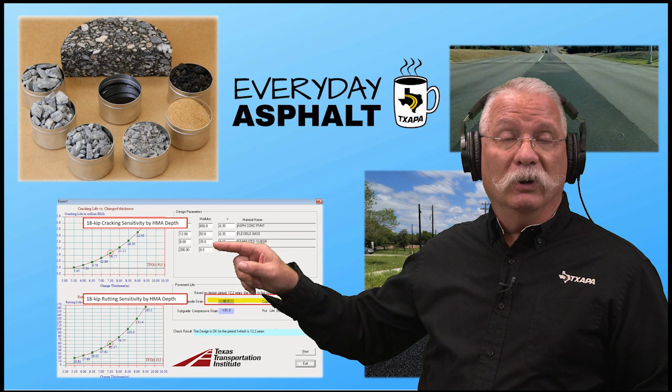This program goes a little bit deeper into the areas of materials, design, construction, and maintenance. It's really important that we understand the interrelationship between all these programs. So we're taking our engineering class, which is available online, and taking these programs, which meet every third Thursday of the month at 3 o'clock, and going a little bit deeper. Today we're going to go a little bit deeper on pavement design.

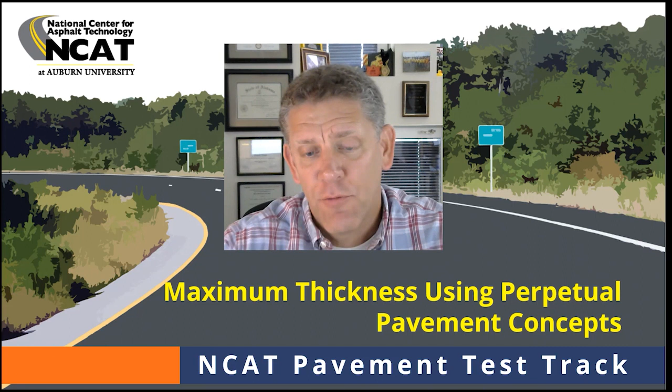Before I start talking about perpetual pavements, I want to provide an overview of where we've been and where we're going in terms of structural pavement design for flexible pavements. Before the 1950s, it was really experience-based - you had local engineers, usually geotechnical engineers, who knew their materials, the traffic and the soils, and they were able to come up with pavement thicknesses pretty reliably under relatively low traffic demands. However, as we advanced into the 1960s, we had the rise of the interstate system and much more freight being carried over our highways, and there was a need for a more robust design system. This led to the development of empirical pavement design methods in the 1960s.

Jump forward into the 1980s, and there was a realization among pavement engineers that we needed an even more robust and more adaptable design system. This is where the first mechanistic-empirical methods were proposed. The problem we had in the 1980s is that we had the ideas, but not the computational power.

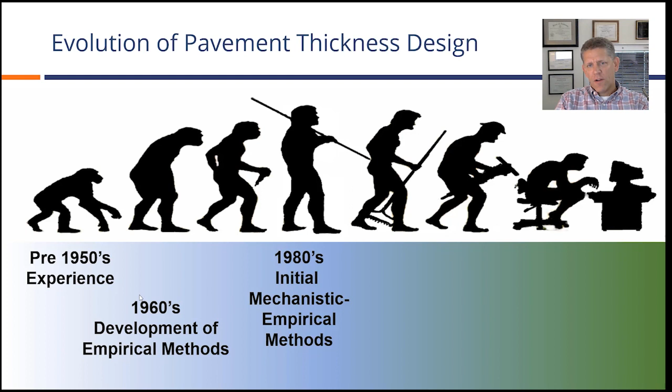It required supercomputers to do the computations needed for this type of design, this mechanistic-empirical pavement design. So it really had to be put on the back burner until we got into the 1990s when computing power caught up with it. Then we had NCHRP 1-37A, a big national project whose main objective was to develop the next generation of pavement thickness design for AASHTO, at that time called the AASHTO 2002 Design Guide.

It's now called the MEPDG, or Mechanistic-Empirical Pavement Design Guide, and it really ushered in the era of ME design. Many states are currently grappling with how best to implement ME design, and that's really where we are now in the 2000s: implementing ME methods. Most state DOTs have either implemented or are doing studies to help them implement ME design.

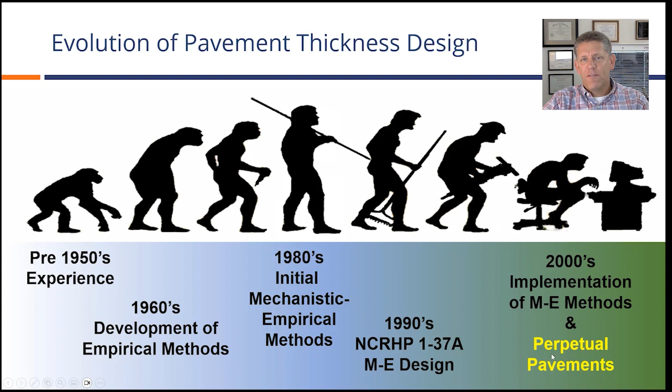As a subset of ME design, we now have perpetual pavements, and that's really the focus of what we'll be looking at. Where we are today, across the U.S., is that we have a variety of empirical or mechanistic-empirical approaches in use. The goal of any design system is to optimize the thickness for the prevailing conditions: the traffic, the environment, the materials you have at hand.

Calibration of those design systems is really critical. You might have heard about calibrating mechanistic-empirical design, or calibration studies, and all of that is geared around making sure that your design system accurately predicts the performance of the pavement so that you can come up with optimized pavement cross sections.

Most of these design systems, many or most of them, do not check at the end for maximum pavement thickness. It's really up to the engineer. Maybe there's a policy decision that has been made somewhere, written down somewhere, but most of them do not have built into the system a check for maximum pavement thickness.

So if you're running the old AASHTO 93 or running a mechanistic-empirical approach, as you continue to add traffic or have higher and higher traffic levels in that design, it'll recommend or require greater and greater pavement thicknesses, and that can quickly lead you into a situation where you have overly thick asphalt pavements.

What's shown in the picture here on the right is a core that we cut out. We had an experimental program going on in partnership a number of years ago with a provincial government in China. They have extremely heavy trucks, and we developed a perpetual pavement experiment, helping them develop and deploy an experiment there. This is one of the 5 sections we built, with a core cut from it.

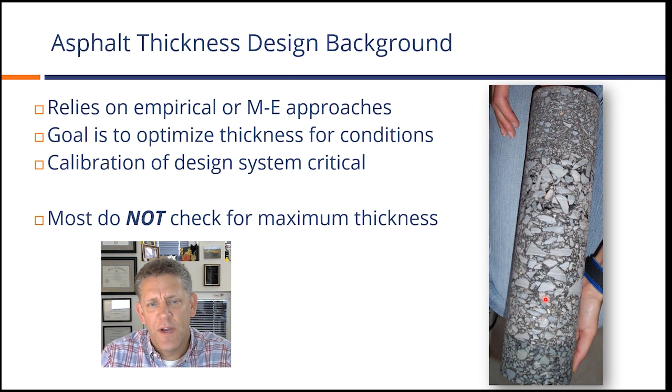To demonstrate this idea that more traffic means more pavement thickness, let's look at a simple example from the AASHTO 93 design guide. What I've got in this plot is AC thickness on the vertical scale, the required pavement thickness, versus the traffic level characterized by millions of ESALs.

Keeping all else constant, you can see that in this design framework, which many states use, as we continue to increase traffic, we have a continued increase in pavement thickness, and there really is no upper limit to it. The rate of change may decrease, it may start to level out, but it just continues on.

In some urban high traffic environments, we can quickly get to traffic levels on this order of magnitude: 50 million ESAL, 100 million ESAL, 200 million ESAL. The sad truth of it is there's no natural upper bound to this according to AASHTO 93, other than what engineering judgment or policy decisions may be made within a local agency.

So the idea with perpetual pavement concepts is that somewhere along this curve there ought to be a maximum pavement thickness. We need to know where it is, so that once we get to or above that point, we don't need to continue adding thickness to the design. We need to be paving further rather than deeper to make the best use of our resources.

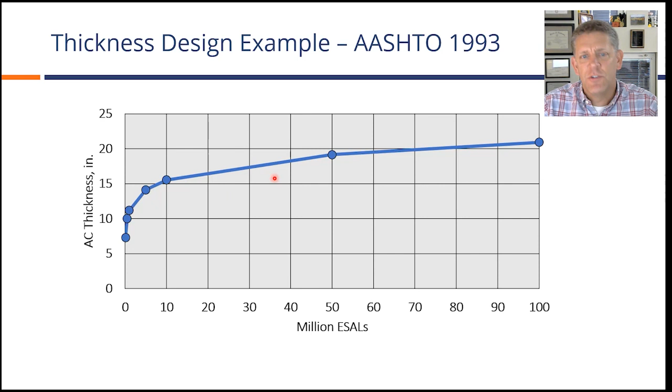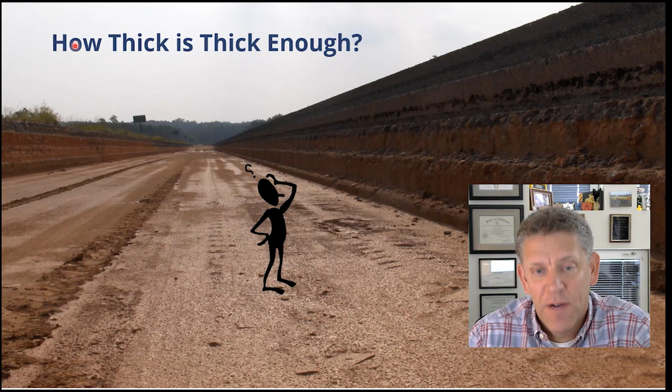Remember that a perpetual pavement is one that does not have deep structural distresses, meaning bottom-up cracking that initiates and propagates to the surface of the asphalt, and we don't have deep structural rutting. So it all begins by focusing our attention on a strong pavement foundation that considers drainage. On top of that, we have these various materials, and we're selecting high-quality rut-resistant materials in the middle and upper layers to combat rutting of the AC mixture.

And then down towards the bottom of the pavement, we need to think about the fatigue resistance, the cracking resistance of that material, because if we do a good job of that, and build it just thick enough, we're not going to have enough tension occurring at the bottom of the asphalt to initiate and propagate a crack to the surface of the pavement.

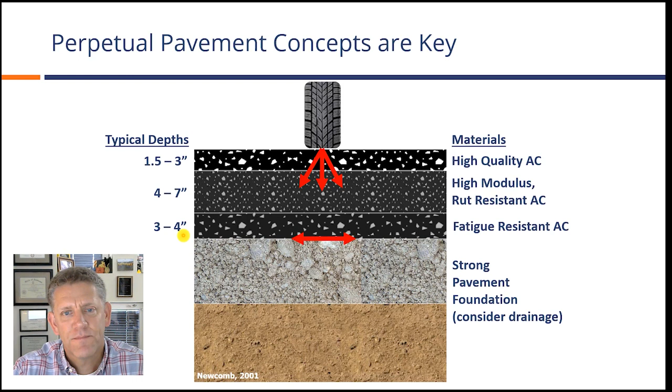You'll see in my following slides and some information that I'll be presenting in just a minute that what we see in the real world is exactly this. We're not looking at 20-inch pavements to achieve perpetual. We're looking at something in that about 8 to 14-inch range to get us there in terms of a maximum pavement thickness.

So how do we come up with a specific set of thicknesses for the design conditions on a case-by-case basis? That's best handled through mechanistic-empirical pavement design. Perpetual pavements is a subset of that. So let's start with ME design, and then we'll do ME perpetual design.

So ME design begins by coming up with a set of pavement thicknesses. We have to guess at what those ought to be, and also characterize the material properties alongside that, say the layer moduli of each pavement layer within the pavement system. We then simulate a loading event on the pavement surface and use a mechanistic model.

So this is the M part of ME design. We use a mechanistic model to calculate a critical pavement response. And then we have an empirical relationship that links the mechanistic response to an empirical prediction of performance. So we know we have a certain amount of strain happening in the pavement under this set of conditions, and then the prediction is made empirically about how much cracking we're going to see.

And we can do that for bottom-up cracking. We can also do that by looking deeper in the structure at the pavement responses there and make a prediction about how much rutting we might see. So that's the two parts: the mechanistic is all the layer property, material property, load event, and so on to get us to a prediction of how much stress or strain we see. And then the empirical part is that empirical link to take that stress or strain and then predict performance from it.

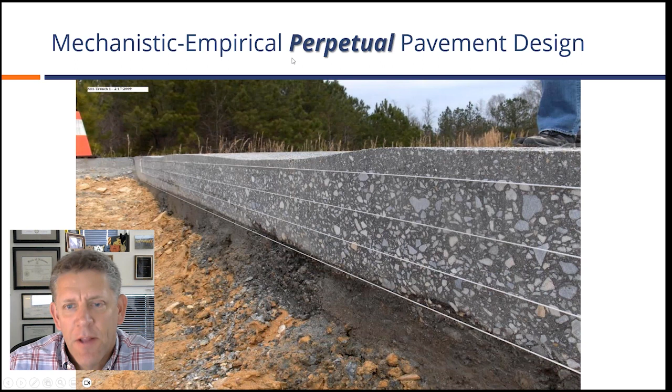Perpetual design has many of the same elements. We still characterize the layer thicknesses and the layer properties. We look at load events, very specific load events in terms of load magnitude. We calculate pavement responses, but now instead of making an empirical prediction of performance, we're trying to limit how much strain we see to some critical level.

We call it the threshold strain or the endurance limit. And if we keep the strain level that we see in the pavement below the endurance limit, there will never be enough, say, tension at the bottom of the asphalt to initiate or propagate a crack to the surface. That's where we want to be in terms of perpetual design.

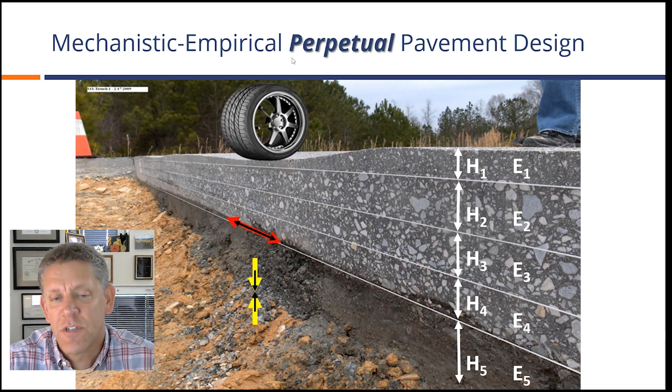And likewise, we can think about deeper in the structure and limiting to some endurance limit, limiting how much strain we see there so we do not see those types of distresses at the top of the pavement. So characterizing that endurance limit is very important in perpetual design.

So given the importance of the endurance limit, you may be wondering, well, how do you measure it? Where does it come from? One of the ways we can come up with an endurance limit is to measure it in the laboratory. We can take an asphalt concrete beam like this and stick it in a bending beam apparatus like that, subject it to repeated flexure, generating tension at the bottom.

We do that at a certain strain level and repeat it over and over, counting up the number of cycles until the beam fails. We normally do that over a range of strain levels. At higher levels, more bending, we generate relatively few cycles to failure, then we drop the strain level a little and get more cycles. We do that a number of times and eventually see a trend emerge where we can link the strain to the number of cycles to failure. This is what I talked about earlier as the empirical part of ME design: a link between a mechanistic response like tensile strain and an empirical performance prediction like the number of cycles until it fails.

This type of testing has been done since the 1960s. There are lots of studies done over the years, and they mostly have in common that you test over a range of strain levels, fit a curve to that data set, and extrapolate it down and up. But what that ignores is the fact that most materials, asphalt concrete included, have an endurance limit—a strain level below which you will not induce damage. If you run this test at a low enough strain level, you find it doesn't continue down.

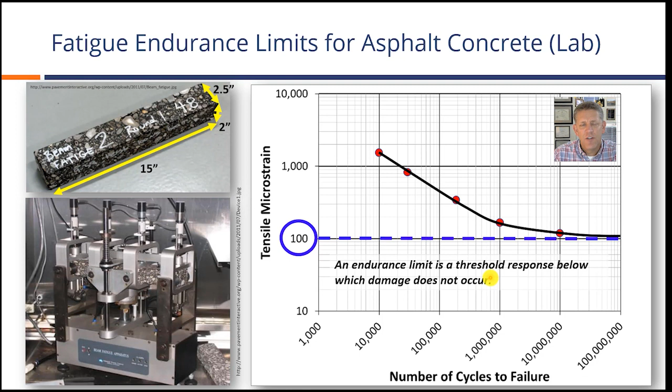So that's how we come up with it in a laboratory. That type of testing is done at a particular temperature and a particular frequency. Though it's meant to replicate field conditions, it doesn't really replicate real world conditions. In the real world, the pavement is experiencing a wide range of loadings, a wide range of environmental conditions, and it's perhaps aging over time. So rather than just having a single strain level, it may experience a whole range of strain levels.

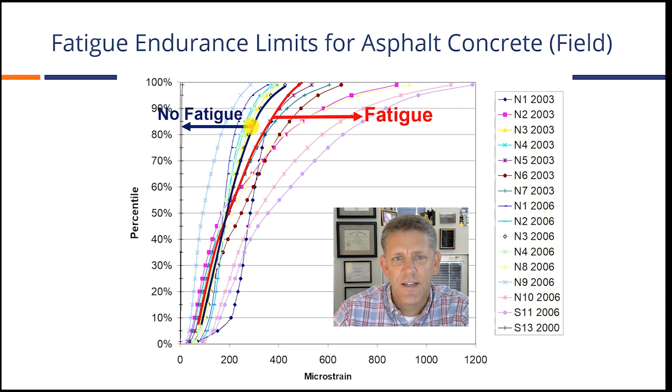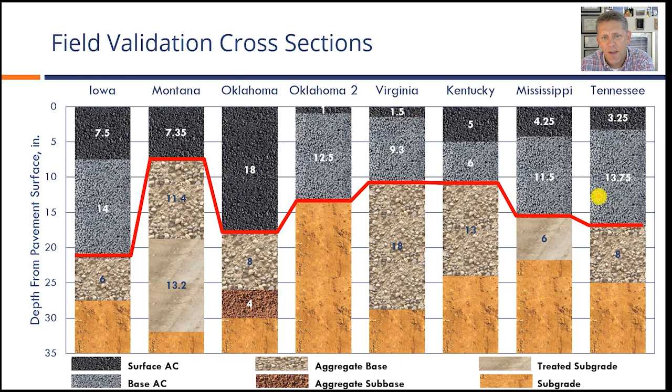So yes, we were able to validate that. You can look at, just like the other sections from the test track, some are less conservative, like Montana being the thinnest of the sections there. That came closest, but didn't cross it. If we look at the thickest section, Iowa, that was the 21.5-inch section. You might guess that would probably be pretty conservative, and compared to the criteria, it definitely was.

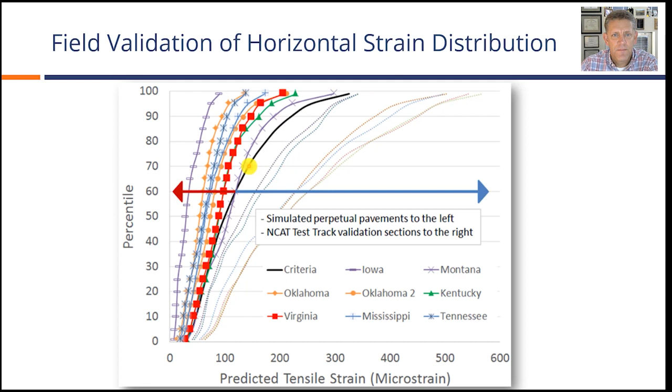And then we had everything in between. Again, these were all pre-existing old pavement sections that met perpetual pavement criteria in terms of performance, and every one of them passed that. So that gives us a lot of confidence that we can use a curve like this moving forward to design and analyze perpetual pavements and come up with maximum pavement thicknesses. So that validates the criteria for fatigue cracking.

What about rutting? If you read the literature and look at research done in this area, most people, or there seems to be some agreement, that we need to look at 200 microstrain vertical compression down inside of the subgrade and control that on average, so at the 50th percentile, for example.

So we took those same test sections that I was just talking about, simulated them, and what we found was that every one of them, the one that came closest was in Kentucky here, every one of them was below the 200 microstrain criteria. And so we felt like that was a good validation, and using that, it seems to give us some pretty reasonable cross sections as well.

And so we have both for bottom-up fatigue and deep structural rutting now criteria that were developed at the test track and then proven by looking at real-world perpetual pavement cross-sections.

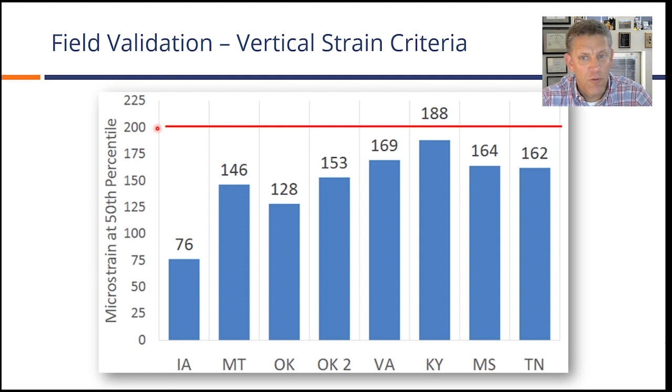The concepts that I've just been describing are embedded within a few different design tools that are freely available. You can find these online.

They were developed for the industry, and they utilize concepts like strain distributions to generate pavement thickness. You can use them to come up with maximum pavement thickness, so it's another tool in your toolkit. If you're doing design with an officially approved system like AASHTO 93, AASHTOWare Pavement ME, TxME, or some other program, you can use these tools as another way to look at the pavement cross-section and see what it's telling you in terms of thickness.

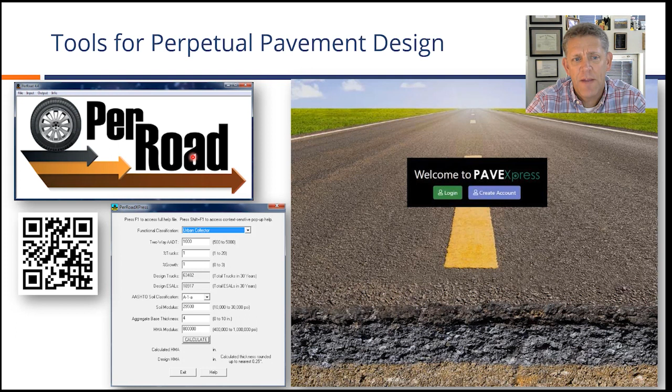Once we had the concepts worked out and the software developed to run what-if scenarios, we did a study led by one of our NCAT research professors, Dr. Nam Tran. We looked at a variety of support conditions, from relatively soft to relatively stiff foundations, and varied the base stiffness of the aggregate base similarly. We also looked at a few different climate zones, from cold to desert to more moderate, like here in Alabama, and tried different base thicknesses.

If you remember that first graphic from Dave Newcomb, he had it around 8.5 to 14 inches for a typical cross-section. Here we have a slightly wider range, 8 to 15.5, but we're definitely still in that same order of magnitude. We're not talking about 20-inch pavement sections, nor 3- or 4-inch sections — we're in that range of about 8 to 15.5 inches in this case.

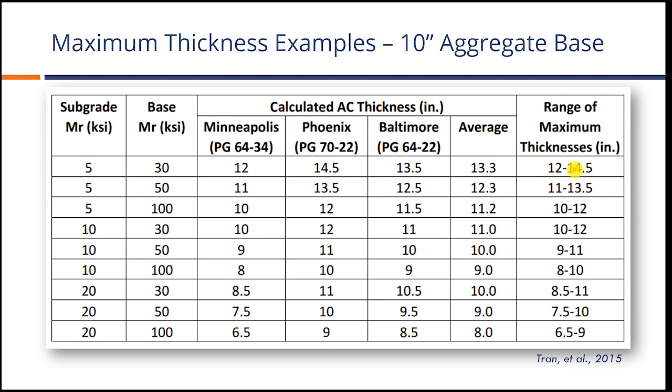From an implementation standpoint, tables like this are really useful because you don't have to go through all the software. You can look at your climate type and soil type, and if you're getting something north of 14 or 15 inches based on this table, you're probably designing it too thick and should investigate further.

They look at the hottest month and heaviest design load, using an axle load of 20,000 pounds, with July as the hottest month, plus some other assumptions and a pretty conservative strain level. They've gone through and done the computations, and the further north you are, the relatively thinner the maximum thickness; as you move further south, it gets thicker, accounting for climate changes across the state.

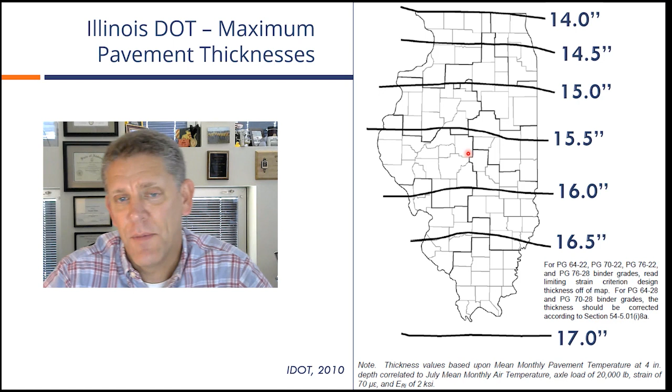In terms of implementation, they have a really simple, straightforward way of doing this. If your project is in the middle of the state and you're coming up with 17 inches, you're probably too thick and need to adjust down. They've used this for a long time and have a lot of confidence in it. So whether you're using a PerRoad approach with strain distributions or something like the Illinois approach, the application is essentially the same.

This is just a particular example, so don't read too much into that. At about 12.5 inches is what this maximum thickness is. But you can imagine that in a hybrid approach, we do a conventional design, but only up until we hit that maximum thickness, and then the maximum thickness takes over. And again, that might shift up or down depending on the prevailing conditions where they cross. But in this example, they crossed at about 12.5 inches.

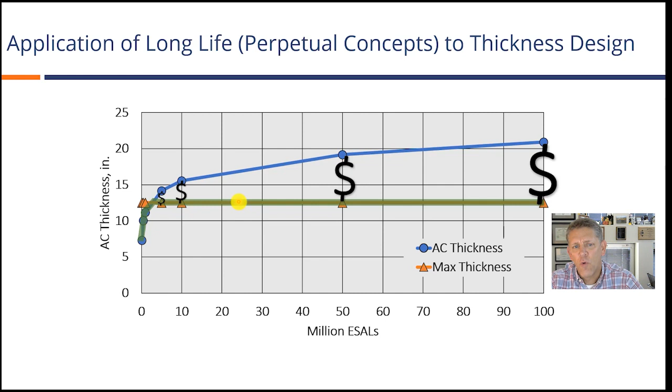And as we go further to the right here, we have greater and greater savings in terms of material, construction, and overall costs and so on. So this is a key concept with perpetual pavements: we can use it in a hybrid approach to just make sure that we're not over-designing and overbuilding our pavement infrastructure.

So to wrap up, I just want to close by saying that most modern pavement thickness design systems aren't checking for maximum pavement thickness. You may have a strong suspicion that it's over-designed and going to perhaps be overbuilt, but most of the systems, unless you have some policy document or something like that, don't automatically check for that maximum thickness. The perpetual pavement concepts that I have presented here today are proven. We have lots of perpetual pavement award winners from around the country.

These things exist. There's lots of data about them, and using that data is where these concepts come from. And we can use those concepts to generate a maximum pavement thickness over a wide range of conditions. It doesn't matter where you are, there's a system that you can follow to arrive at a maximum pavement thickness. If you use perpetual pavement in conjunction with conventional design, that can help you achieve more efficient pavement sections and keep you away from getting these overly thick pavement cross sections.

And finally, and I believe strongly in this, designer-friendly deployment is important. Having to run really complicated design simulations can be an impediment to implementing this type of thing. Having tables like I showed, or having a simple contour map that shows what the maximum pavement thickness is in your area, I think is a really effective way to go about implementing these types of ideas.

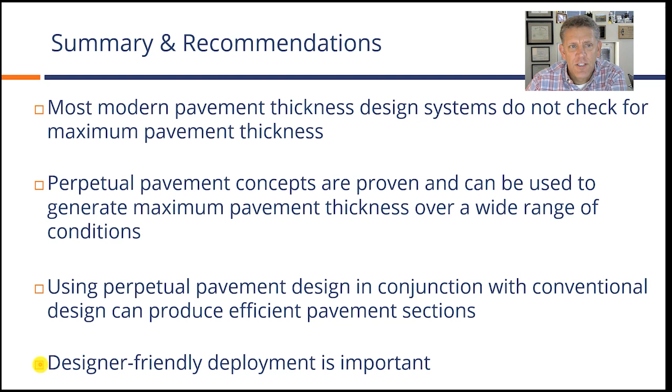And so with that, I'll just show you a couple of references. If you're interested, you can find these online very easily. If you go to our NCAT website, ncat.us, you can find some of our reports, and this one in particular that talks about these maximum thickness ideas.

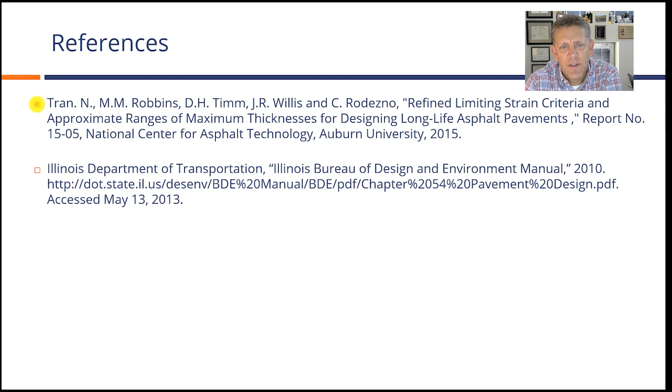Thank you. All right, we are back with David Timm. A great presentation, David, a lot of great stuff in there. I had a couple questions, if you don't mind.

You know, one of the things that's really interesting about that is, we think about the traditional load repetitions and that kind of stuff, and eventually stuff's going to fail, right? And I think that's the thing we learned about perpetual pavements today, is that if you don't overstrain that stuff, it's not going to fail. So we really can build these pavements that are going to last essentially forever, which is, I think, from an engineering standpoint, an economic standpoint, and a sustainability standpoint, that's a home run, that's a grand slam, you know.

Thoughts? Yeah, so I agree 100%, obviously, with everything you just said. And what's really interesting to me is, as pavement engineers, we're trained to design for ultimate failure, right? Using the old AASHTO '93, we say, okay, it's going to tail off over time, and we design it to fail. Or in Mechanistic-Empirical, we say, okay, after 20 years, we're going to have 25% cracking, we've got to go out and tear it up and repair it and everything. We don't design any other civil infrastructure like that. We don't design a bridge to collapse in 20 years. Well, that's a good thing. And so, yeah, exactly.